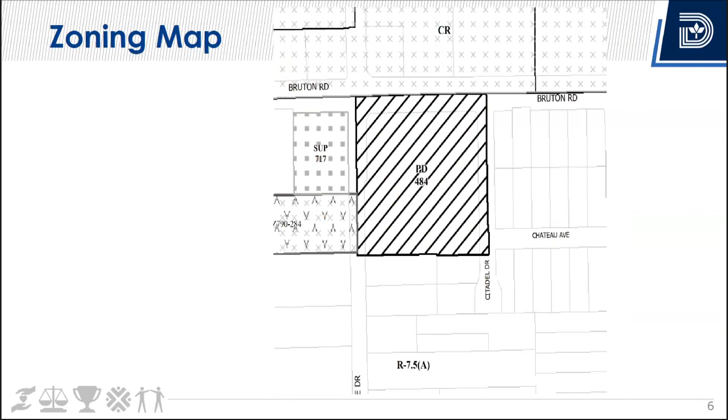This is to amend a development plan and a landscape plan for an existing school to reconfigure the parking lot to accommodate a trash enclosure. The parking lot is being amended, and there would be a change in the parking space by 2, and you'll see the reconfiguration of the parking lot in a minute. This is located on the east side of Dallas. This is the aerial map and the zoning map, and this is the proposed development plan.

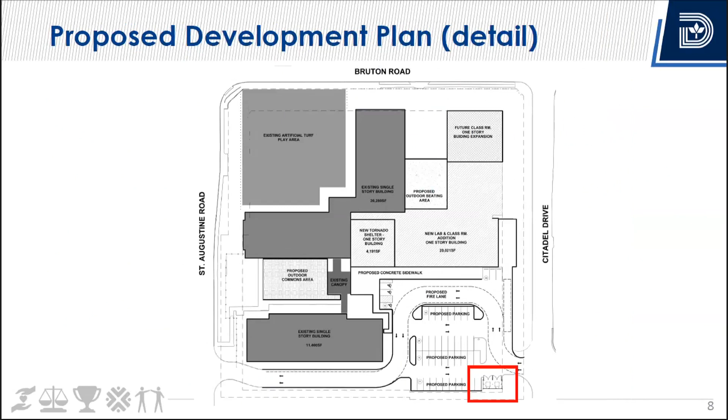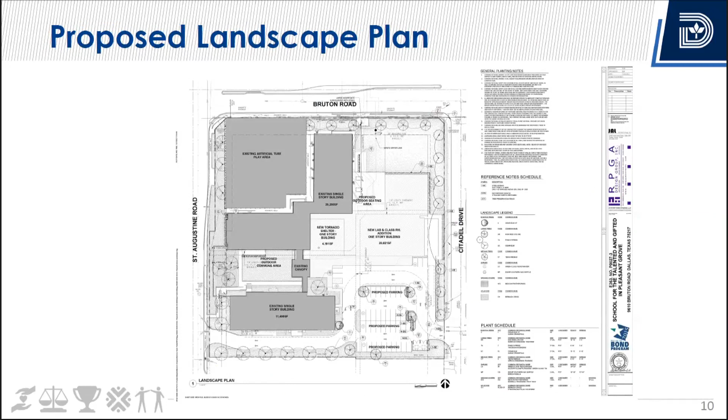The detail is the trash enclosure is located on the south side of the property. The existing development plan, as you can see, has no trash enclosure. There is no effect to the proposed landscape plan, as the trash enclosure will be on 2 parking spaces. This is the existing landscape plan, and staff is recommending approval.

Thank you very much. Questions, Commissioners? Okay, next case, please.

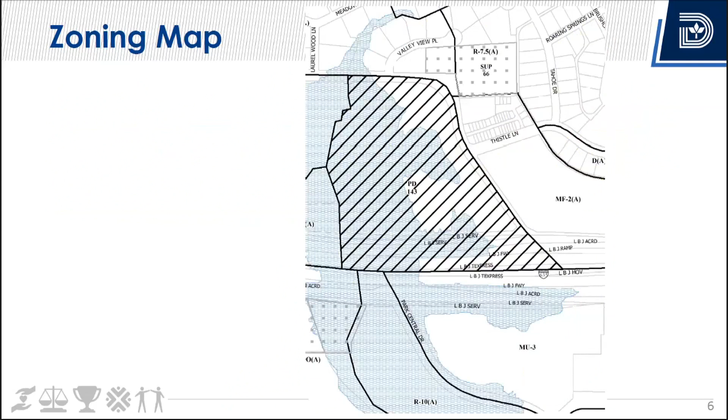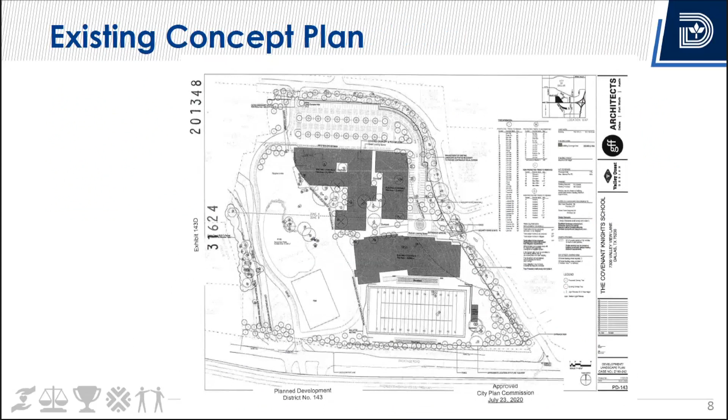This is located in the northern section of Dallas. This is the aerial map and the zoning map, and this is the proposed development plan. The structure that's being affected is that southern building, the large gray one now. Staff is recommending approval.

Ready for questions? Yes. Questions, Commissioners? Any questions on this item? Okay, we'll keep moving to number 4, please.

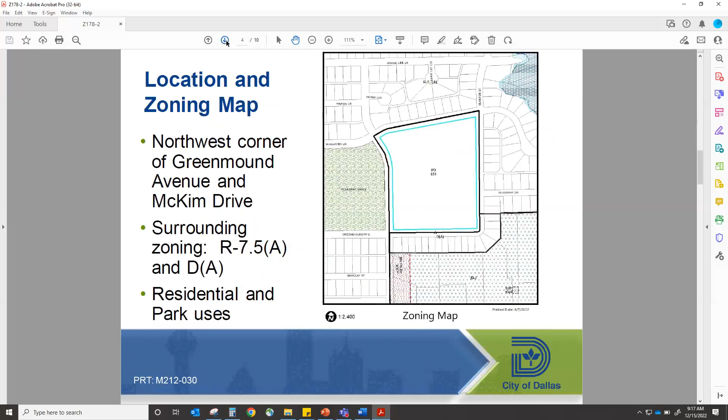The location of the PD on the zoning map is generally on the northwest corner of Greenmound Avenue and McKim Drive. The surrounding zoning is R-7.5(A) and duplex, residential, and park uses.

And the request contains the following: a new fire lane with hose coverage for the portable classrooms, a detention pond on the back end of the parking lot fenced in, a small playground with canopy for pre-K, and 32 additional parking spaces. The updated TMP as requested by transportation engineering staff was submitted, reviewed, and approved.

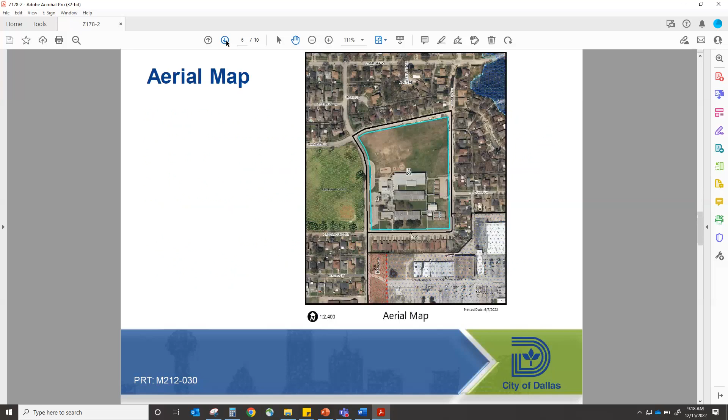And staff is recommending approval. You can hold for questions.

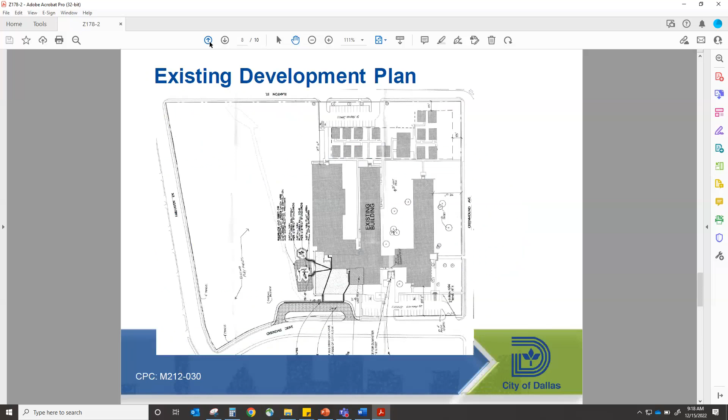Commissioner Treadway, please. Hi, good morning. The retention pond, is there a fence around it or anything? Just because it is close to children and a playground, I didn't know what the protocol was for it.

Yes, there is a new change shown on the development plan. You see here where my mouse is pointing. So the question was, is there a fence or other protective device around the retention pond so that the kids can't access it?

Can y'all hear me okay? We can, can you hear me? Okay, because yes, there is a fence. I am circling with my mouse where it is shown on the development plan.

Okay, thank you. You're welcome. Thank you. Thank you both.

Commissioner Young, please. The driveway leading into the retention pond, is that for servicing it, cleaning out debris and so forth? Are you referring to this right here? I'm afraid my eyes are not working. Yes, that's what I'm referring to. I'm not quite sure if that is a driveway, I will wait for the applicant to respond to that later on. Okay, I'll ask later. I suspect that's what it is.

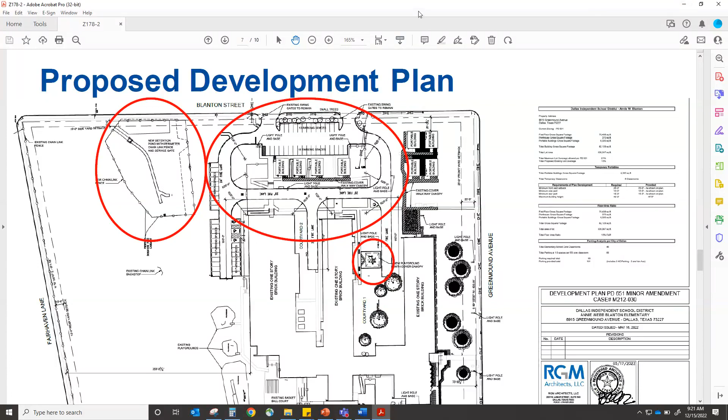Request for a minor amendment to an existing development plan on property zoned PD 68. The applicant is Cooper Aerobics Enterprises, 24 acres in Council District 11.

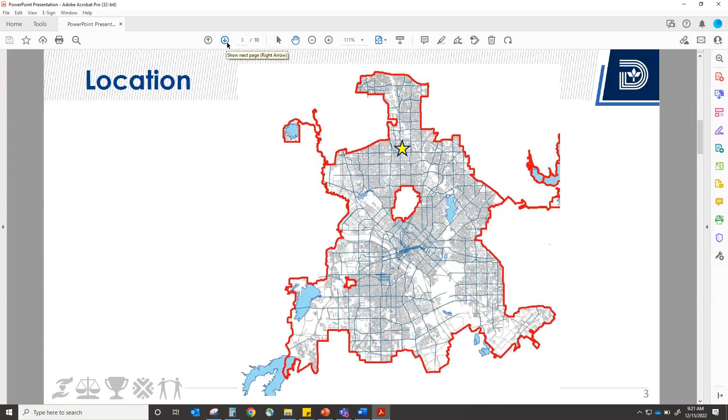Location of the PD is generally on the southeast corner of Churchill Way and Preston Road. Surrounding uses are residential.

The amendment is to allow for the addition of approximately 6,900 square feet to an existing building, Building 6. They're adding to the main level and constructing a mezzanine level. Building 6 will total approximately 58,340 square feet, or 47% of the currently allowed square footage.

Total floor area allowed per the PD is 268,460 square feet. With the new addition, total floor area will be 164,649 square feet. The lot coverage increases 0.3%, or 3,000 square feet. There is no increase in height.

The proposed additions and modifications would supplement uses currently allowed in Building 6, and they are doing this to allow for social distancing of exercise equipment.

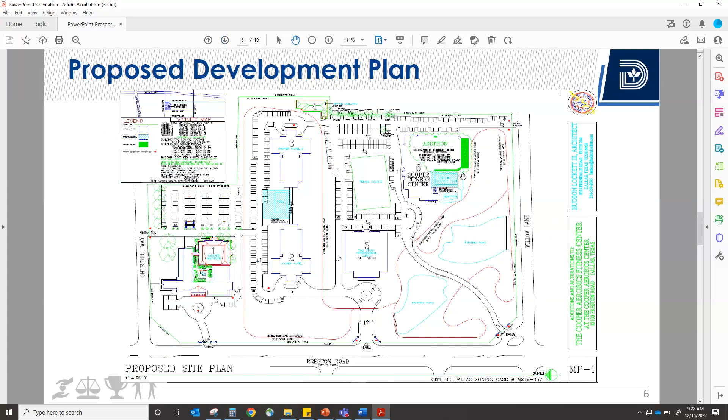The proposed development plan, and here is Building 6, and this is where the building addition will occur, in a larger view here. The existing development plan, highlighting the area on Building 6.

And staff is recommending approval. Questions, Commissioners? Any questions for Ms. Carrasco on this item? Okay, we'll keep moving.

Last case, D212021, which is a request for a new development plan and landscape plan for an office use on a portion of property zoned PD 765, Plano ISD, Council District 12, a little over 2 acres. The general location of the PD is on the southeast corner of Oxford Drive and Mapleshade Lane.

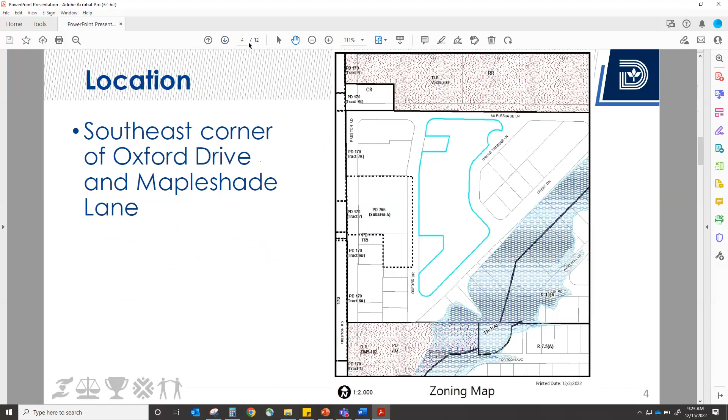Summary: the applicant is proposing a 1-story office building for Plano ISD, maximum height of 25 feet, total floor area 10,800 square feet, and they will be providing 150 surface parking spaces.

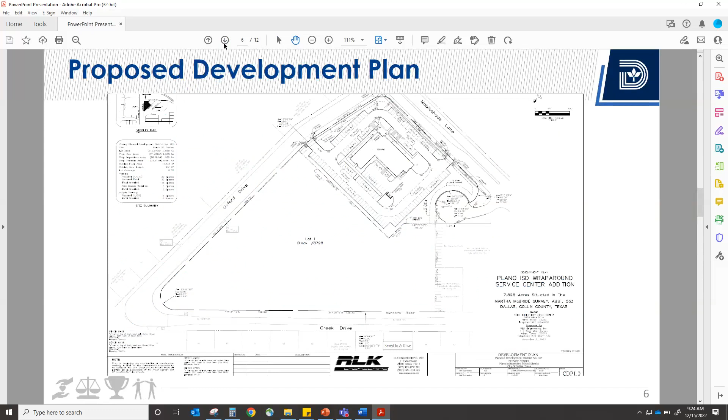The landscape plan is in accordance with Article X, and it is shown on the landscape plan, which I will show here. And the proposed development plan, this is the entire PD. However, they're only developing this building here on this portion to the north.

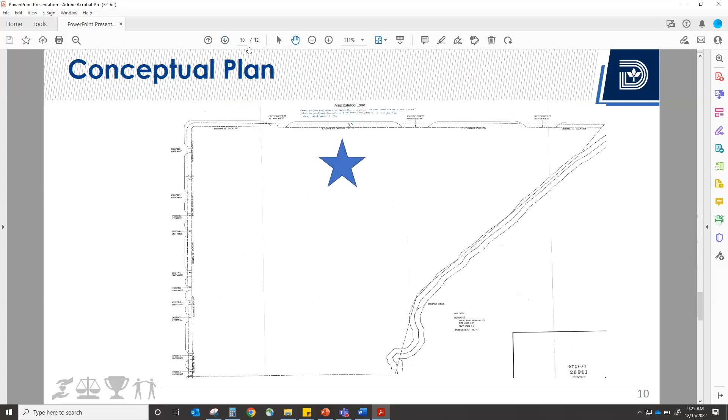Enlarged view. The landscape plan. Landscape plan enlarged. Conceptual plan, and I put a star here where the building is on the concept plan. Staff is recommending approval.

Thank you, Ms. Carrasco. Questions? Any questions on this item? Okay, thank you very much, Hannah.

We'll just, can we come back to number 2 maybe a little bit later? I think Commissioner Hampton is going to be just a little bit late. Pardon me? Number 6. Yes, oh, thank you, please.

D212020. This is a development plan for a child care facility on Planned Development 1040, Tract 3. It's approximately 3.4202 acres, located on the northwest corner of Lancaster Road and Crouch, in District 8.

This is an undeveloped parcel of land for the child care facility, and it is a 1-story development with surface parking, and landscaping is according to Article 10. This is located in our southern region of our city.

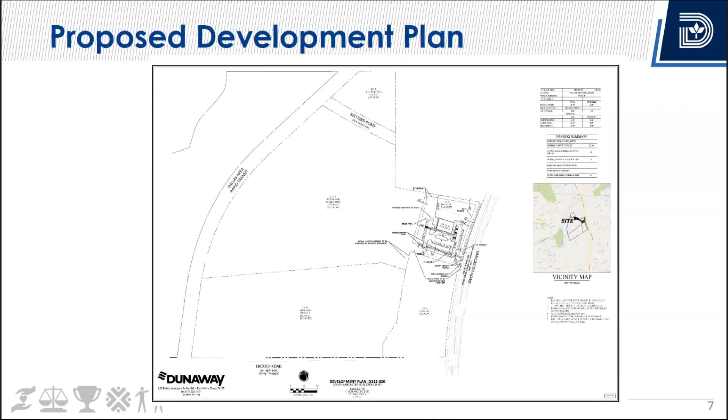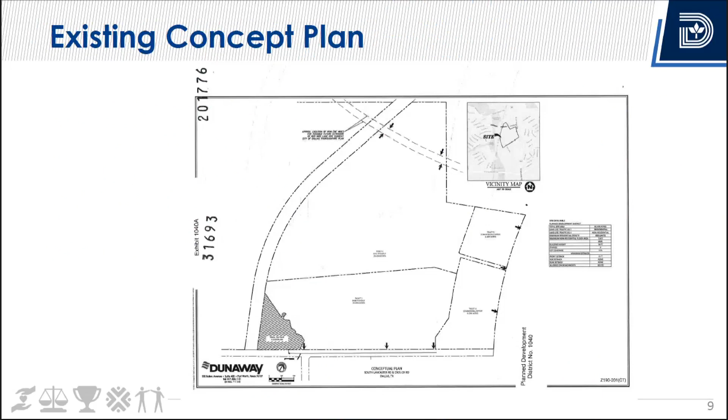This is the aerial map. As you can see, it's undeveloped. And the zoning map. The proposed development plan, and there's the detail. And the existing concept plan, as you can see, it's just for residential as well as commercial properties.

Staff is recommending approval. Questions, Commissioners? Okay, no questions. Number 7, please.

At this point, Commissioners, all cases are still on consent except for number 11. Number 11 has come off consent, and we will hold that case under advisement till January 5th, and we will brief it then. Number 11 will be held under advisement till January 5th.

So, Mr. Mulkey, if you don't mind, we'll skip number 8 for now. We'll come back to it. Begin with number 9. And Ms. Munoz.

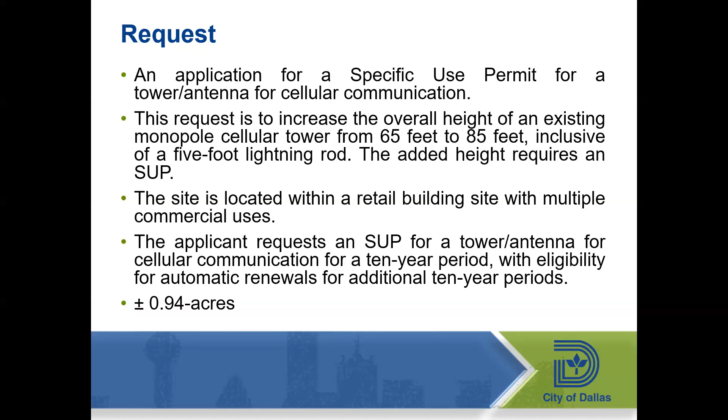Here is the section of the code that refers to it being by right in the CR district, but once it exceeds 65 feet in height, it requires that SUP, which I also put a link to in your case report if you need more time to look that over.

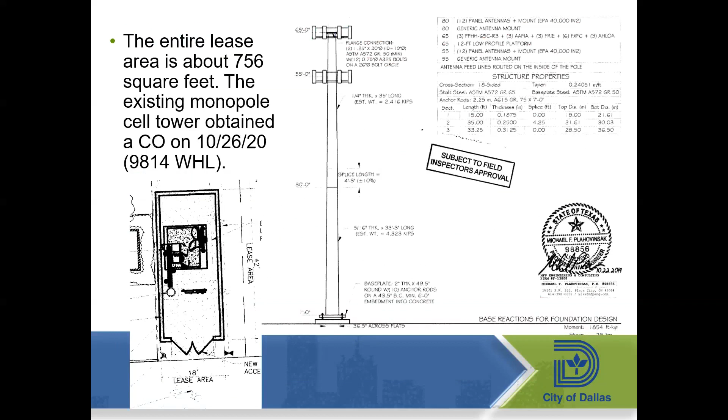This is information regarding the building permit, which was issued back in October of 2020, so it is a legal build of that cell tower that currently exists. The property is on the southeast corner of Walnut Hill Lane and Audelia Road in Lake Highlands.

Here's an aerial map that shows you the developed nature of this intersection and the entire parcel, which includes all those retail uses, including that cell tower. And the zoning map.

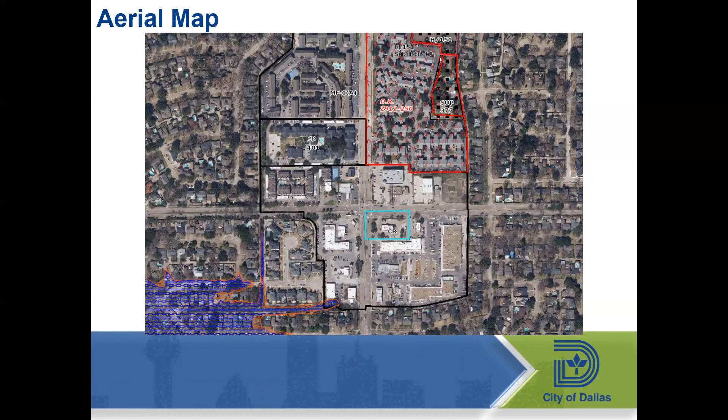Now here we have the zoning and adjacent land uses. Of course, the site itself has several retail and personal service uses, including a restaurant with a drive-through and the cell tower itself.

To the north, we do have additional CR district and PD 401, with other retail and personal service uses, including general merchandise or food store. There's also a multifamily development with a private community center, which is the SUP on the site. Continuing north, there's more multifamily, and then further to the east and west on the north side, across Walnut Hill, there's single family.

You can kind of see there's this commercial node right at the intersection where this site is, and then it extends out into higher density residential, and then finally single family. So to the east, we have CR district as well with some more retail personal service uses that are adjacent, and then that single family transitions to R-7.5(A). Same thing can be said of the south and to the west.

Here are site photos. I included a couple of Google shots so you can get a different view. This is us looking south onto the property from Walnut Hill, and here's another view from Walnut Hill that I took when I was there.

From the angle I shot it at, you can see that 65-foot tower is pretty concealed behind this oak tree. Here is within that retail property, where there are other uses, including an ice vendor directly in front of it. You can see the existing CMU brick wall that surrounds the lease area.

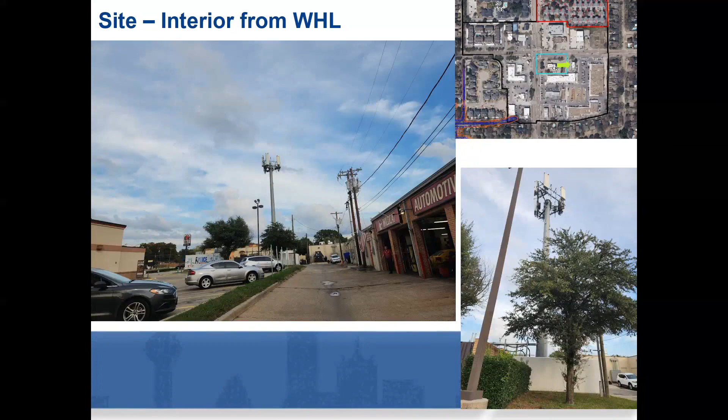Here we're looking at it again from the interior of the lot. This gives you a view from the street outward onto Walnut Hill and Audelia. And here are the surrounding uses.

Across Walnut Hill and Audelia, at the northwest corner, there's some multifamily and an auto service center. To the east, a general merchandise or food store, and other retail and personal service uses, including, adjacent to the east, and then adjacent to the site, a restaurant with drive-through. To the west, another general merchandise or fuel or food store with a fueling station, and another one.

So here is their proposed site elevation plan, combined onto one page for our viewing. This is the overall build site, and the lease area is here right at the center.

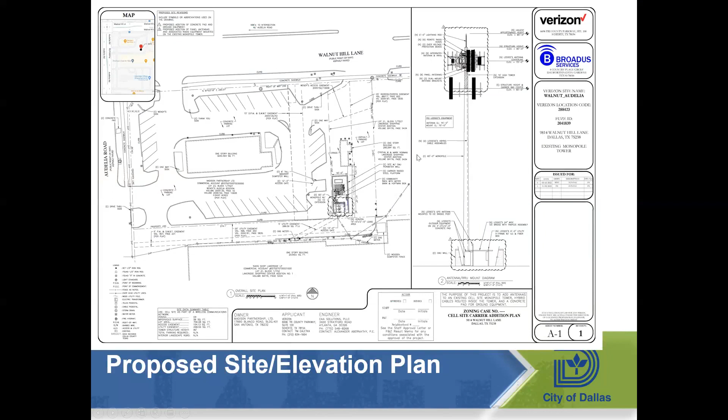If you can see, I'm pointing at the wrong screen here. The overall build site is identified by the property line, and interior here is where we have that lease area. Then here is the elevation showing the height and overall build of that tower.

This is detail from examining that site plan, which indicates the tower area is about 750 square feet for the lease area, and it contains a generator, carrier lease area, equipment, a meter bank and box, and a pad for the monopole tower, which is 10 by 12, 120 feet, with a cement pad and other equipment in other areas.

Then it has the CMU wall that I mentioned surrounding the site, and access, which is internal to the build site, but there is a dedicated access identified there.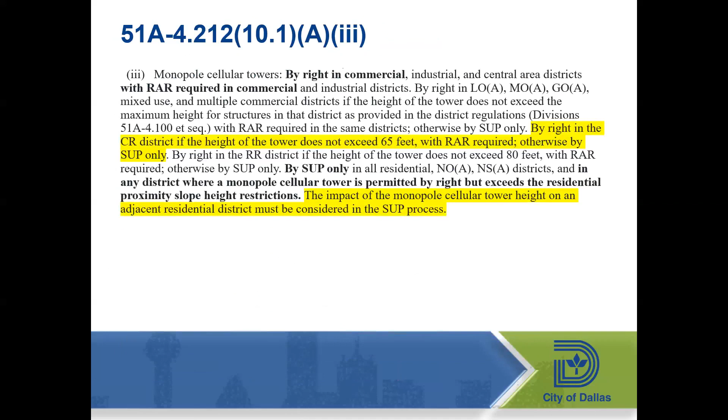So what I did is I looked at what the RPS would be for this site, generating from the adjacent single family and multifamily properties. So two different slopes that I would be looking at according to our RPS from our code. And then this is the height requested, and these are the maximum heights based on the zoning district and location from property line to the pole.

And so the pole could actually be a maximum of 440 feet in height when we're looking at adjacency from the north, and a minimum of 153 feet in height when looking for the nearest residential adjacency to the east.

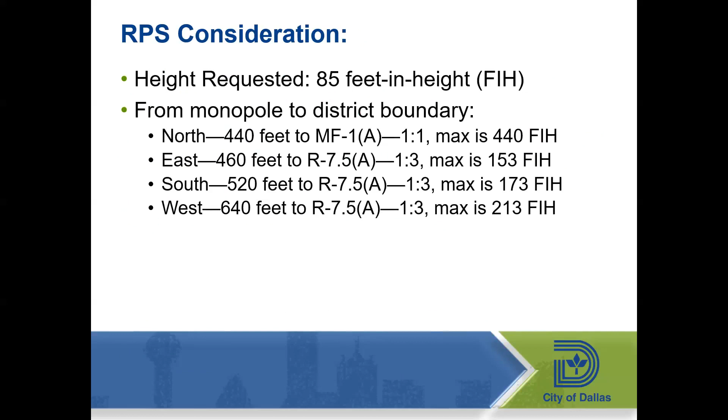And so the request of 85 feet is well within those limits, and so staff did find it to be appropriate. And of course, it's necessary for these neighborhoods to have proper service. So staff recommendation for a 10-year period with eligibility for automatic renewals for additional 10-year periods, subject to the site elevation plan and conditions as I presented today.

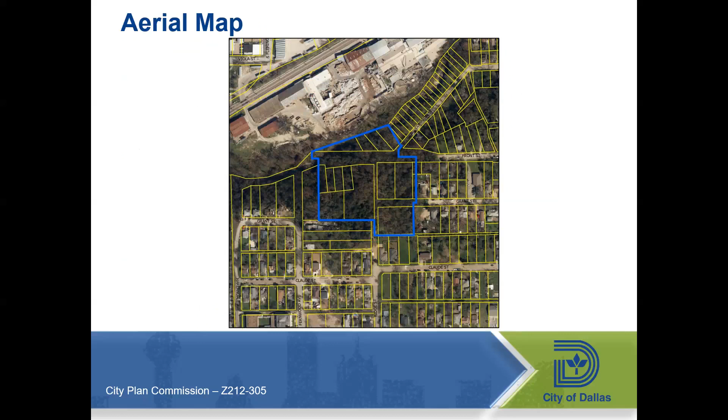So to the south primarily is R5A zoning. A little further west of that is some existing MF2A zoning. Uses within that area are predominantly single family. However, to the east, there's also an existing church. To the northeast, zoned LI today, are other single family uses as well as undeveloped property. And then immediately due north under PD 564 is an industrial, and so potentially incompatible use. It's an existing paper mill.

So some background on this: the area of request is currently zoned both an R5A district and an LI district, and it's undeveloped today. The applicant proposes to develop the site with multifamily. They're still kind of working on their concept a little bit because this is a general zoning change.

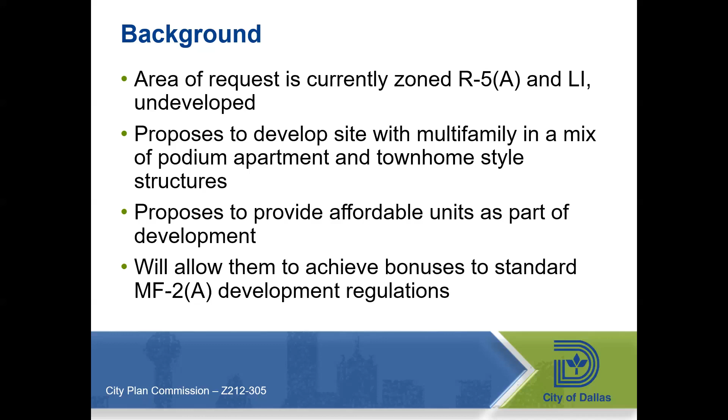They have tossed around the idea of a mix of a podium apartment building with some townhome-style structures. They've also talked about just having townhome-style structures for the site. The applicant is prepared to speak this afternoon if needed, bright-eyed and bushy-tailed, so he can give you some more information about that. They also propose to provide affordable units as part of this development, and if those units are provided, it would allow them to achieve bonuses to the standard development regulations of a straight MF2A district.

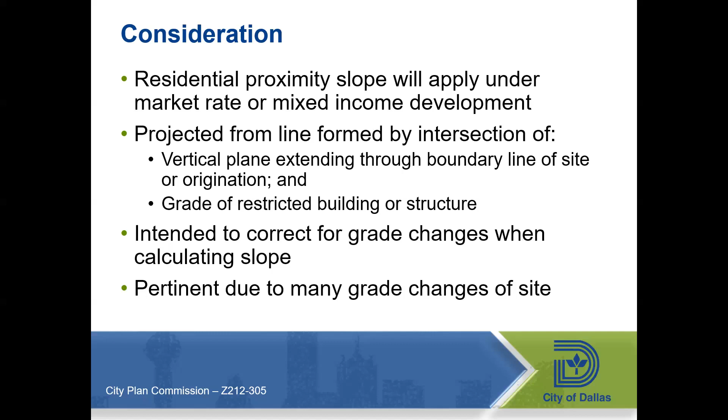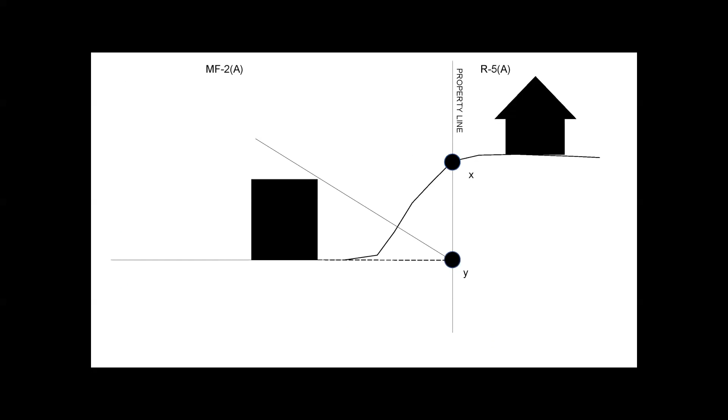And for you visual folks, that's what this looks like. So this is an example where the grade of the MF2A and the R5A are the same. This is an example when the grade of the MF2A is lower than the R5A. You can see that RPS slope is still being applied. And then this is the opposite, when the MF2A is at a higher grade than the R5A, still corrected to apply that slope appropriately.

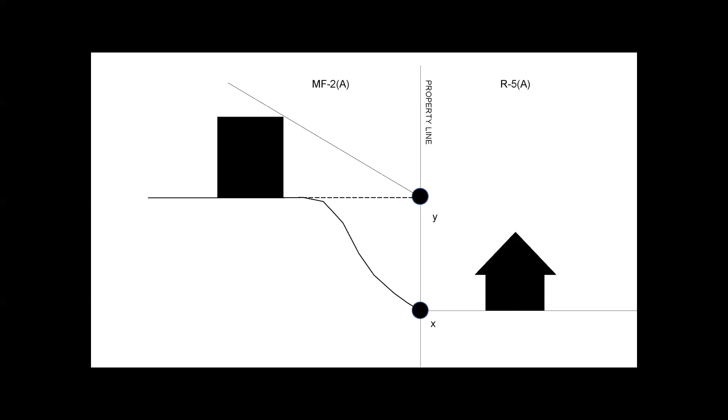Questions? Commissioner Young. Yes, first of all, Mr. Chair, I'll have some questions for the applicant, so if we could take this case off consent, I'd appreciate it. Thank you. Actually, that's all.

Thank you. Commissioner Stanner. Yes, I do have a question, and it may be my ignorance, but when I hear this, and I heard what you justified and how you saw this, that when it talks about, well, you can have some multifamily in R5 areas, okay.

And then if you have the mixed income, if I'm not correct, actually, if it were just going to be MF2A without the mixed income, it would be 36 feet, correct? Correct, following the RPS. So now you're saying that with the 5% MIH, it can go up to 85 feet.

And then what you said was, I'm just going ahead, was that, and I do have this question, was that in certain single-family areas, it's appropriate to have MF, which I agree. What I'm concerned about was when it said it's appropriate to have MF in some single-family neighborhoods, they weren't anticipating the MIH bonus taking it up to 8 stories. They were thinking more in terms of it being 36 feet, 6 feet taller.

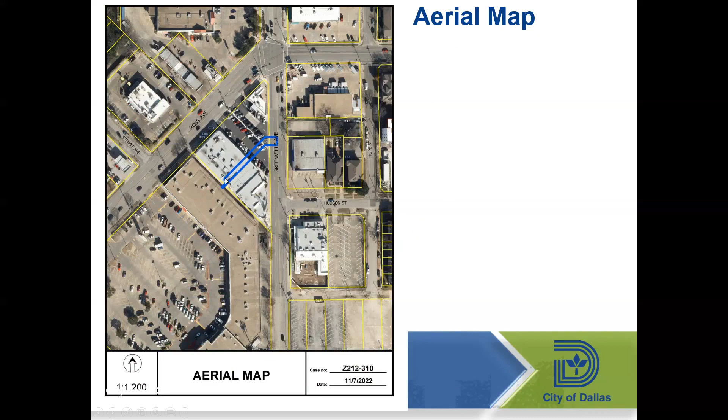The property is between Ross and Greenville Avenues, on the south end of Lower Greenville. Here's an aerial map showing that property. As you can see, it's a kind of triangular property. It's one suite within a plaza, and they've done the metes and bounds to have the SUP apply only to that specific section.

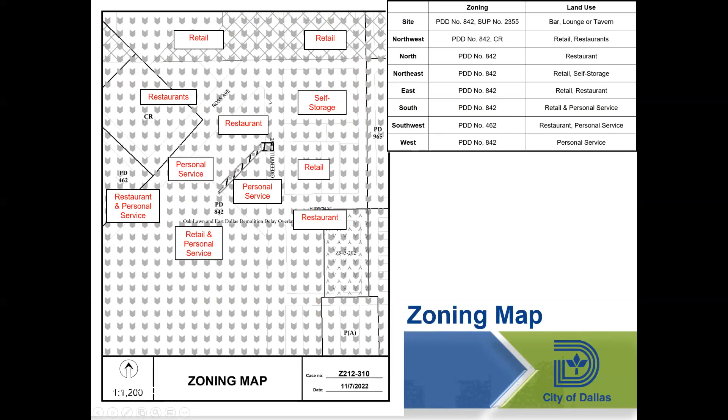Here's the zoning and surrounding land use map. Most properties surrounding the site are PD 842, except to the southwest where we have PD 462, which has a restaurant or personal service use, and to the west where we have CR District to the northwest. All surrounding properties have retail or personal service uses, except for a self-storage facility to the northeast.

The overall site has over 24,000 square feet within this shopping center. The applicant began operating Ship's Lounge back in 1965.

In this PD, anything that operates between the hours of midnight and 2 a.m. is considered a late hours establishment and requires an SUP. This bar that currently exists operates from 11 a.m. to 2 a.m. the next day, 7 days a week, which requires that late hours SUP.

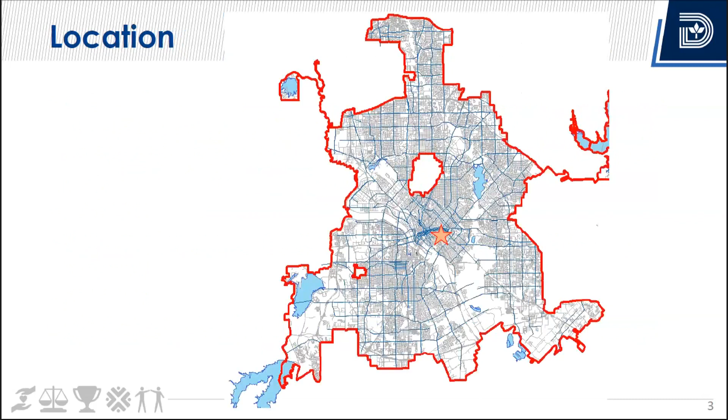This item was held under advisement at the November 17th meeting. This is located just a little bit southeast of downtown. This is the aerial map, the zoning map, and a little bit about the background of this property. This is a requirement from the PD itself.

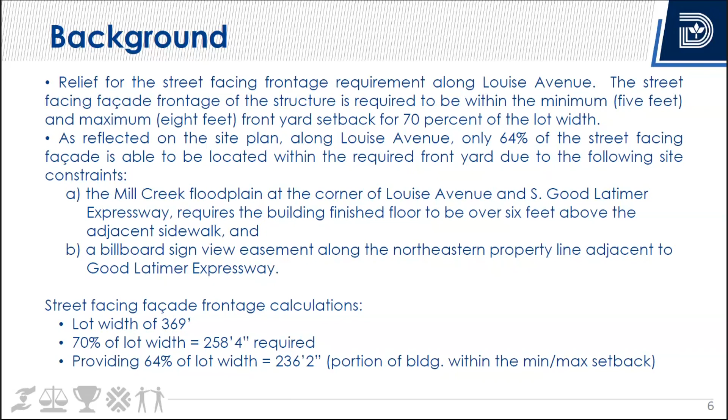What they are asking for is relief from 70% to 64%, and it's only affecting the property on Louise Avenue, the street front facing facade. So I gave the calculations at the bottom: the lot width is 369 feet, and the requirement is 258 feet and 4 inches, and they're asking for a reduction. The reason is they have a floodplain corner that needs to be raised, and a billboard sign easement along the northeast property line. So this is the ordinance requirement.

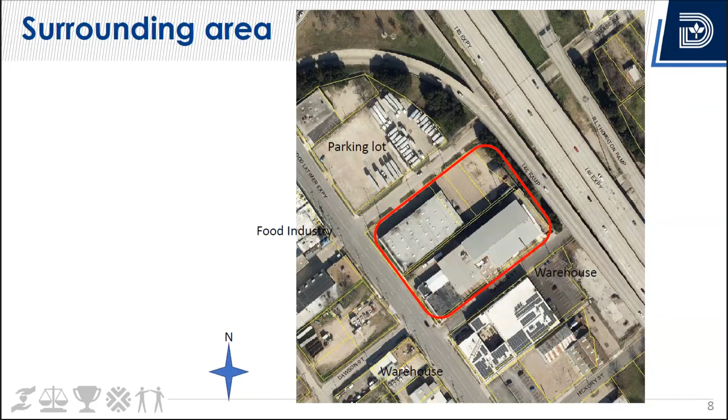And these are the surrounding areas. It's in our industrial area, but this property is going to be revised or looked at. The north facing is just a parking lot across Louise Avenue. This is the intersection off of Louise and Good Latimer, and the east view of Louise and the I-345 overpass.

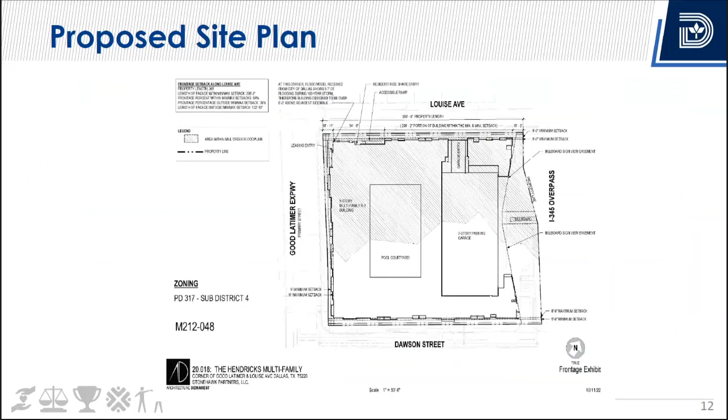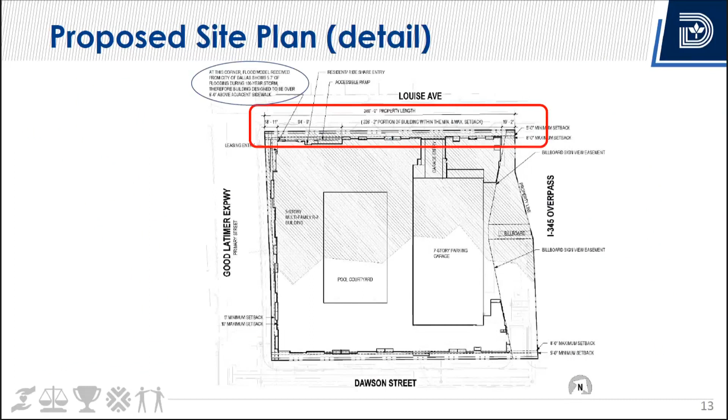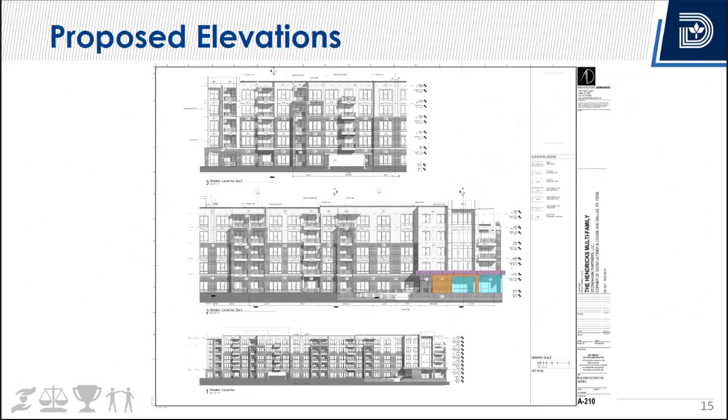And so you'll see the proposed site plan, and this is the detail of what you will be voting on or reviewing. This is the plat that we did submit, so you can see the easement areas, and this is the elevation that the applicant has provided. Staff is recommending approval subject to the site plan.

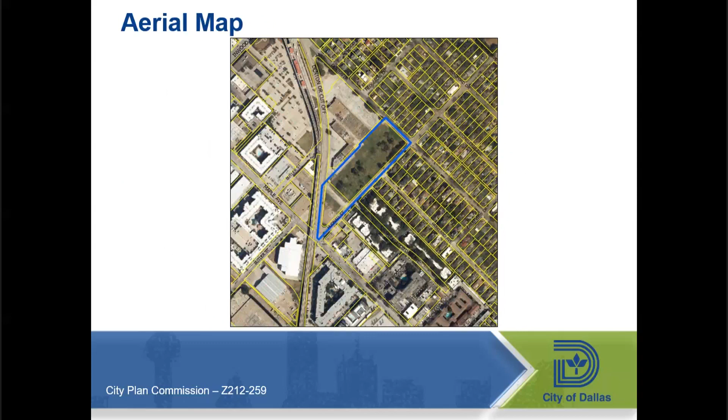Aerial map with the full PDS number 128 outlined in blue. Zoning map with surrounding districts and land uses. Zoned a GR district within PD 193.

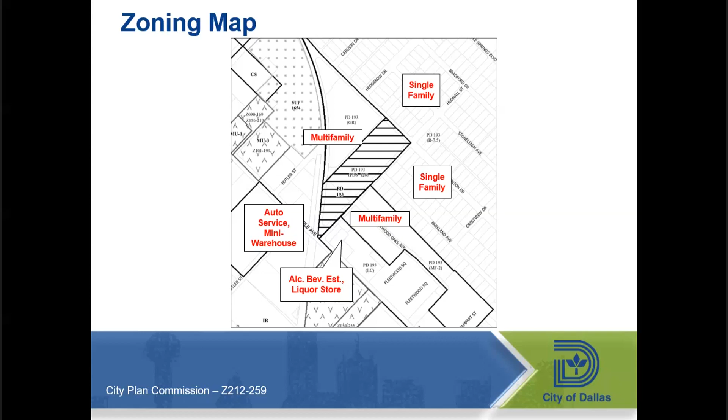To the northwest is a multifamily use currently under construction. To the northeast and southeast are single-family uses zoned an R-7.5 district within PD 193. Also multifamily to the southeast zoned an MF2 district within PD 193. Within a local commercial district within PD 193 is an alcoholic beverage establishment as well as a liquor store. And to the west are auto service and mini warehouse uses.

So it's currently zoned PDS number 128 within PD number 193, and it is developed with a multifamily property. At the time of adoption of this PDS, council added a provision that surface parking is limited to one row of spaces along Hudnall Drive in front of the building facade between Fleetwood Oaks Avenue and Denton Drive. It's sort of assumed this speaks to head-in surface parking in front of the building.

This would be permitted separately from the parallel spaces that have been built along Hudnall Drive, as well as the private drive along the northwest boundary of the site, on the other side of the site. This provision that was adopted effectively prohibits surface parking anywhere else on site, so the applicant is currently unable to utilize those parallel spaces along Hudnall and along the private drive.

To amend this, they propose a new tract within PDS number 128 that would apply only to the multifamily site and allow the use of these parallel spaces. No other changes are proposed to the existing conditions. However, they also propose to add a conceptual plan exhibit to this PDS outlining the boundaries of their proposed tract.

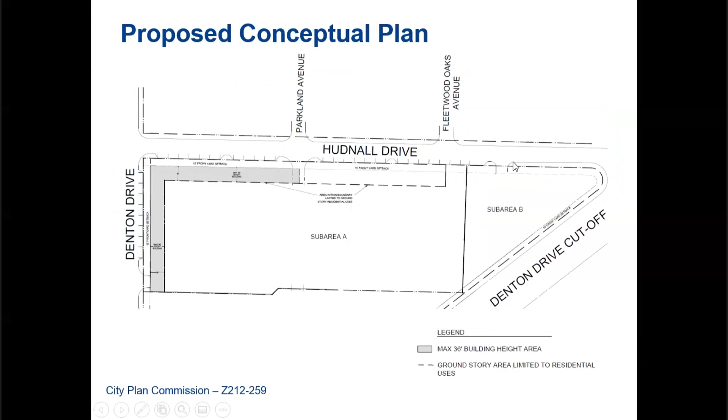This is the applicant's proposed conceptual plan. You can see they're outlining their site as subarea A, and then the remainder of the PDS would be designated subarea B. Staff's recommendation is approval, subject to a conceptual plan and conditions, and I'm available for any questions.

Commissioners, questions for Mr. Mulkey? Commissioner Hampton. Thank you, Mr. Chair. Mr. Mulkey, thank you for the briefing. I know we've had some correspondence on this.

Is it correct that the spaces that are along Hudnall are in the public right-of-way and are on-street parking, not off-street? I believe that is the case, yes. I think that's the verdict that was reached.

And is it correct that there is a separate section of the code that actually governs on-street parking for public streets as well as private streets? I believe so, yes.

This amendment is requested because there's been an interpretation on the private drive, the northwest boundary of the site, as the conditions are proposed. Is that correct? That's my understanding. I think the applicant isn't currently able to apply those spaces to their minimum required parking, so they're essentially not able to utilize them.

And I see the applicant is here if we need to get a clarification on that. I think they have all their required parking, that these are actually just additional convenient spaces that are provided. Yes, that could also possibly be the case.

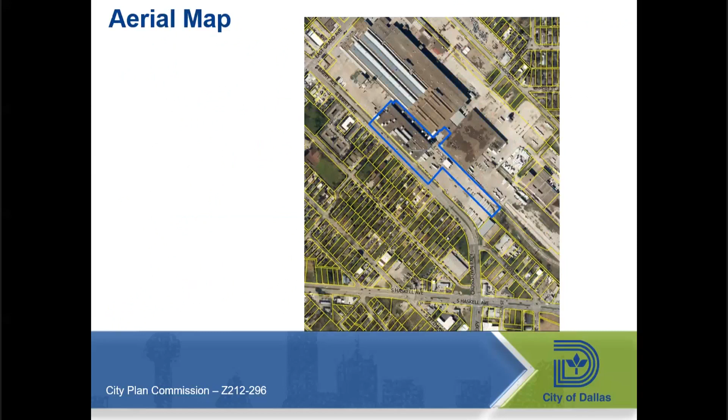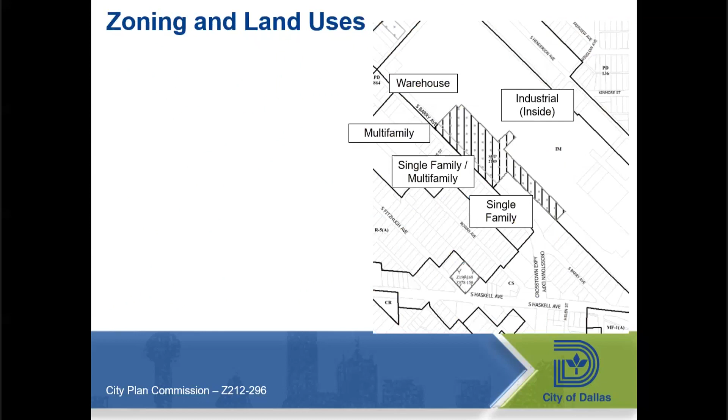Here's the site as it exists today. Area of request reflects previous SUP approvals. To the northeast, there's industrial inside uses and warehousing. South across Barry Avenue are single-family, multifamily, mixed residential, and more multifamily all along Barry. The area of request is developed currently as a recycling buyback center with an associated warehousing building.

The applicant is proposing to renew the SUP with minor amendments to the conditions, reflecting the conditions accurately as they exist today. The existing facility consists of a 2,000 square foot recycling building, an office, and a roughly 119,000 square foot sorting warehouse. The applicant is not proposing changes to the facility or site plan. The proposed use is allowable in the IM district, subject to a SUP only.

Here's that existing site plan that they're not proposing any changes to. This has been their site plan through their course of operations.

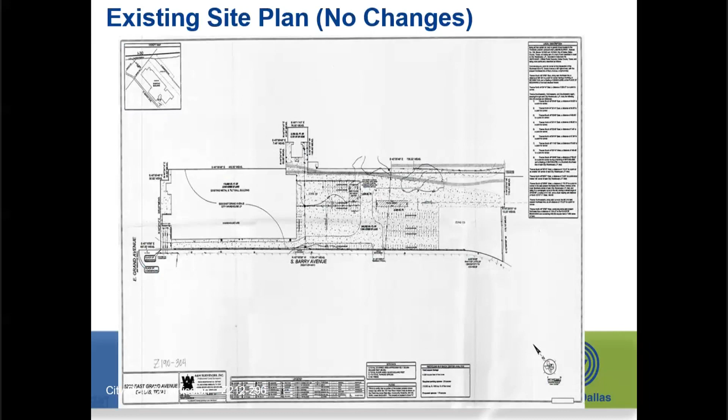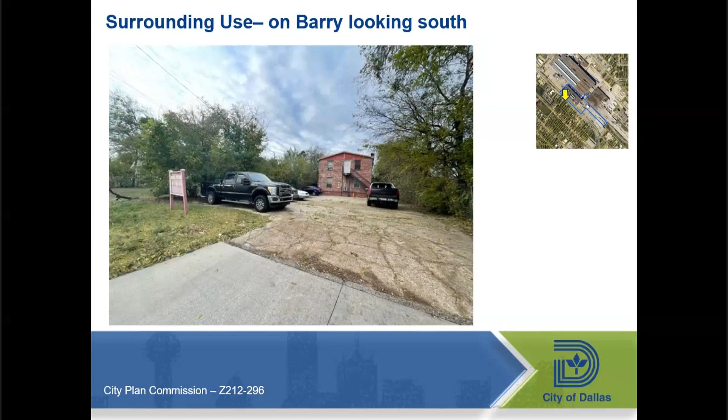Across the street, we've got multifamily, currently built out today, some single family as well, and additional single family, and we are looking south down the street.

Their proposed conditions remain similar to how they have been approved in the past. This particular use is limited to a maximum of 2 years of approvals per code. That's in the definition of the use, and so that's the time period that they've requested and have requested throughout the years. And so those are all remaining the same.

Other conditions include the licensing condition, outdoor storage is prohibited, and then through working with the applicant, we added a couple conditions: exterior lighting must be directed away from adjoining residential properties, and the property may have no more than 12 loading docks as shown on the site plan.

These conditions, the applicant and I agree, reflect the conditions on the site at this time. They line up the conditions more closely with the existing conditions, so they should not have a problem meeting these conditions as they are met today. Staff recommendation is approval for a 2-year period subject to conditions.

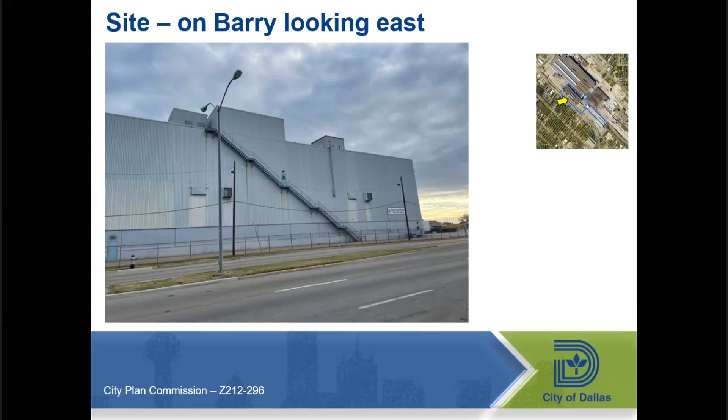And are you aware in your conversations with the applicant that they actually have staff who help monitor and stay on top of the trash to try to mitigate that? I am aware. Thank you, Mr. Chair.

Commissioner Young? Mr. Chair, as a personal indulgence, let me just say I can close my eyes and see the late Commissioner Neil Emmons wrangling this case through its first SUP grant. I remember that. Oh, boy.

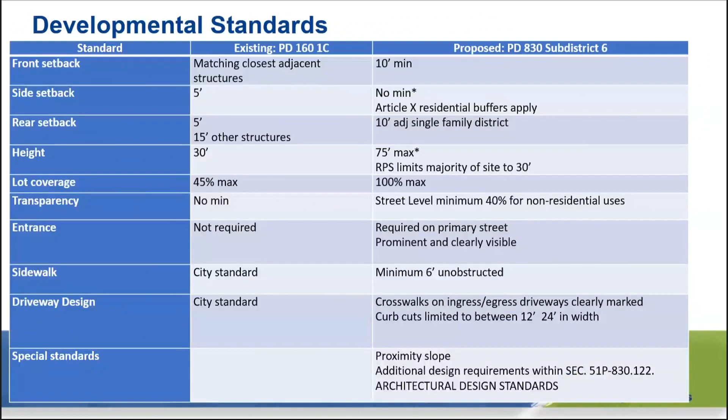Commissioner Carpenter, please. Yes, although the expressed intent of the applicant is to do a restaurant without drive-through or an office, this is basically just, not exactly a straight zoning change, but you're just changing from a residential PD to a PD that is mixed use.

They could theoretically do any use that's allowed in PD 830. It is a mixed use zoning district, so various uses are allowed. This is not one of those amendments where it is only a single-use outcome or what have you, so there are a variety of uses. It could be multifamily, duplex. Correct, yes, so there are multifamily uses in PD 830 Subdistrict 6. There are neighborhood scale commercial uses as well, including office.

Was any consideration given by staff to the fact that these boundaries between these PDs were very carefully negotiated at the time the PDs were created, to draw a clear line of demarcation between the existing single-family neighborhood and the redeveloping commercial or mixed-use corridor? I'm not sure if that is there. There are different blocks where the zoning varies from lot to lot. We see that pattern farther west, where some are in PD 830, some are not.

So it varies where these properties are, just delineated between the two PDs. There's a similar example where it's not a straight line, farther west on Bishop, for instance, and PD 830 itself goes up Bishop. I realize it's not a straight line, but there are so many different sub-districts in that 830. My understanding, and I was involved in the process at the time to some extent, is that those boundaries were carefully delineated sub-district by sub-district, but thank you.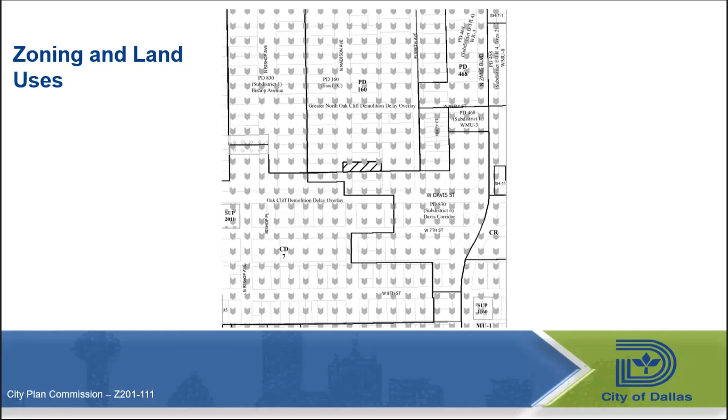Move to our next case, number 15. I believe this one has not been briefed before. Is that correct, Commissioner Carpenter? It has not. Thank you so much.

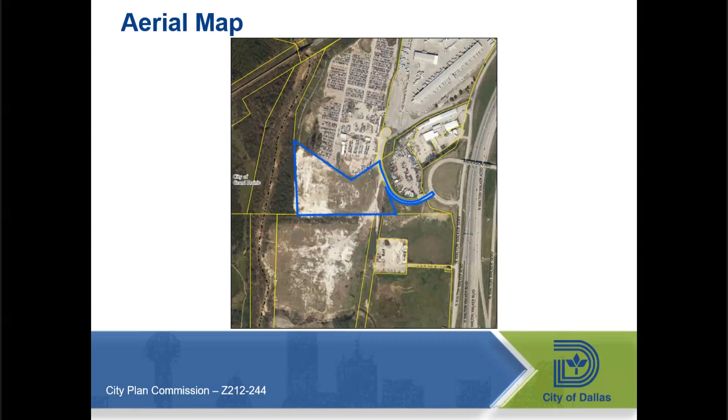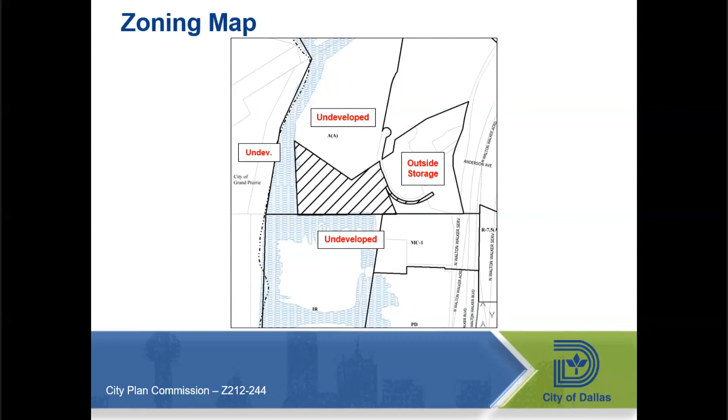Aerial map with the property outlined in blue. Zoning map with surrounding land uses: to the north, zoned agricultural, is undeveloped. Within the city of Grand Prairie to the west is also undeveloped property. To the east is outside storage, also zoned ag. To the south, zoned IR, is undeveloped property. The subject site is currently zoned ag and is undeveloped.

The applicant proposes to develop the property with warehouses. The original request was for a CS district; however, on November 3rd, CPC held this item under advisement to today's meeting with instructions to staff to advertise for an LI district with deed restrictions volunteered by the applicant. These deed restrictions would prohibit some of the uses that would otherwise be permitted in the base LI district.

These are the development standards of the existing AA district, as well as the originally proposed CS district and the LI district now under consideration. The biggest differences between CS and LI: a 30-foot setback adjacent to residential, whereas in CS it would be a 20-foot setback; slightly more permissive FAR standards; max height would be 70 feet rather than 45 feet; same lot coverage.

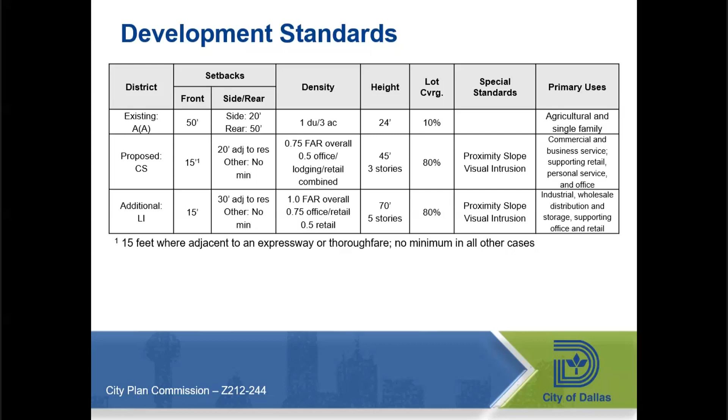RPS, visual intrusion, would both apply. And then, of course, similar uses, although with these deed restrictions, some of those uses would be prohibited. With that, staff's recommendation is approval of an LI Light Industrial District with deed restrictions volunteered by the applicant in lieu of a CS Commercial Service District, and I'm available for any questions.

Thank you very much. Questions, Commissioner Carpenter? Mr. Mulkey, I know you and I have gone through this, but for the record, is it your understanding that this is a former City of Dallas landfill site, and as such, it was a place where material from the RSR lead smelter plant was dumped, including battery chips and slag and casings, and has been monitored by the EPA since that time and is not considered to be suitable for residential uses? I'll say on the record that's outside the scope of zoning and land use review. However, I am aware of that information.

All right, thank you. And also, last question, the CS zoning would have limited them to 45 feet, and the warehouse they are proposing building requires a bit more than that, in the low 50s, I believe. And even if they went to the 70 feet of height that's allowed by LI, there's no residential proximity slope issue. That's correct. There's no surrounding residential properties that would trigger that. Thank you.

Any other questions, commissioners, on this item? I can't see our folks online. If there's any questions there, please speak up. Okay, we'll keep moving. Next case.

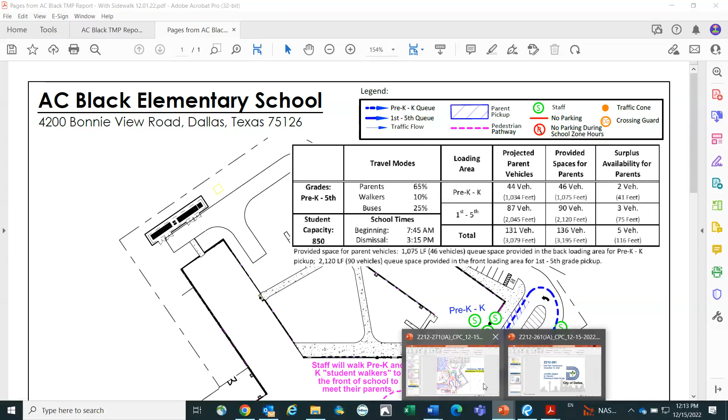Property is surrounded by some duplex uses to the south across Glenwick, single family to the east across the Greenway, also some multifamily. To the north, there's a commercial center, a drive-through pharmacy at the corner there. And then to the west across Inwood Road, you have a bank, some undeveloped property, and some office spaces as well.

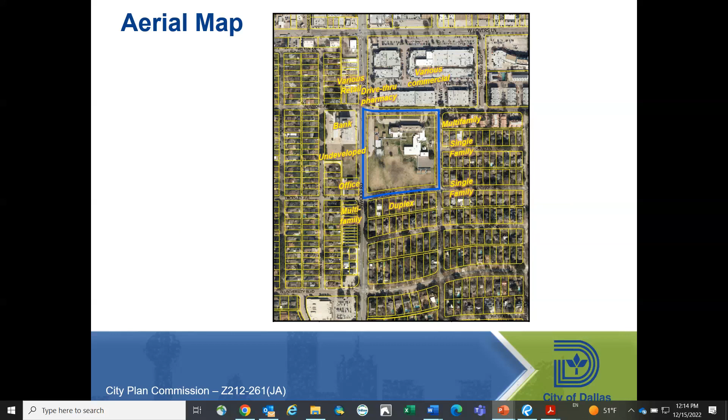Area request is currently zoned, and it's the entire block currently zoned, currently developed with a public middle school and academy, Longfellow Career Exploration Academy, and the applicant proposes to construct a new middle school and then demolish the existing school. There is an existing plat, and like a number of the cases you've seen before for schools already, this was a PD application and was amended to a request for an SUP. Main reason for the original request had to do with landscaping, and the timing of that is able to be extended through the base code.

So on November 17th, at that hearing, the case was held under advisement to today's date. We received a new submission on November 23rd. That's what you see included in the case report. And then the current status of the staff comments that were in the original report have been updated to show current status on pages 3 through 5 and 7 through 9, in the traffic section and in the land use compatibility section.

Just a chart showing development standards. This is in your case report.

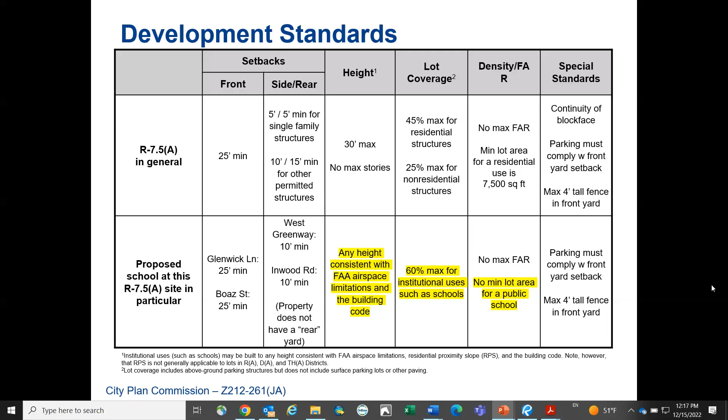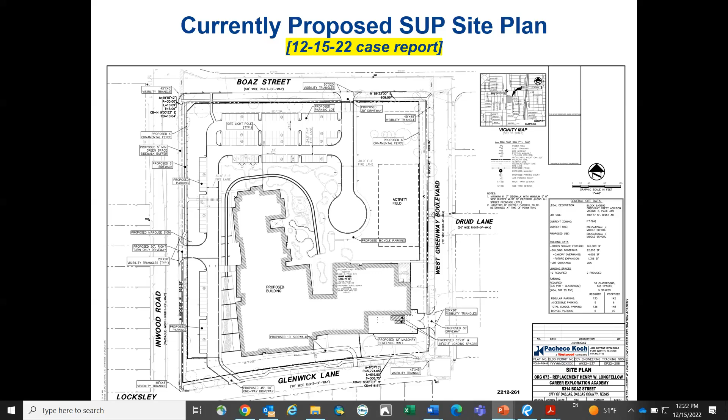I've added a couple of staff recommended SUP conditions to the PowerPoint just so you can see the language of this. It's in the case report, but as the SUP ordinance language develops, we're coming up with some standard language. You'll start to see these in all of the SUP conditions moving forward, having to do with unobstructed sidewalk width at schools and then some pedestrian amenities along the street frontages.

Staff recommendation is to hold under advisement to February 2, 2023, since there are still fairly substantial issues that need to be resolved and may or may not need a bit of redesign.

Questions? I'm sure we will have some questions. Commissioner Stanner, please.